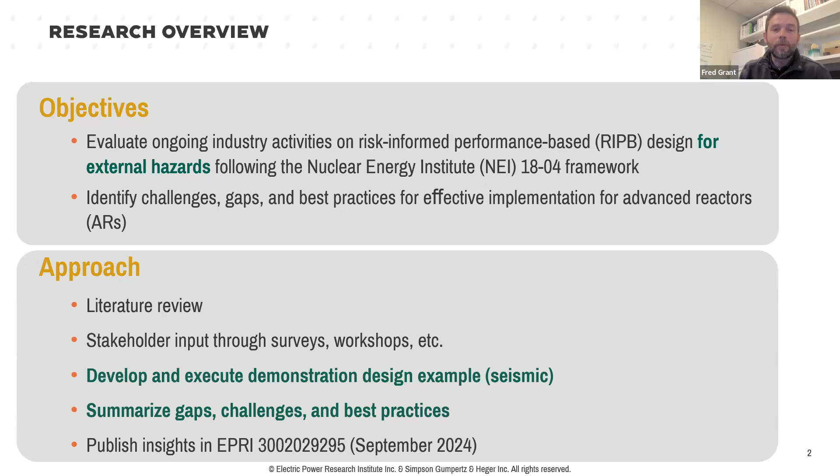The two green bullets below will be the focus of this presentation. We'll walk through the demonstration example, then cover a few insights, gaps, challenges, and best practices that were identified. The report number is listed for anyone interested, available for EPRI members and EPRI Advanced Nuclear Technology section sponsors, ANT sponsors.

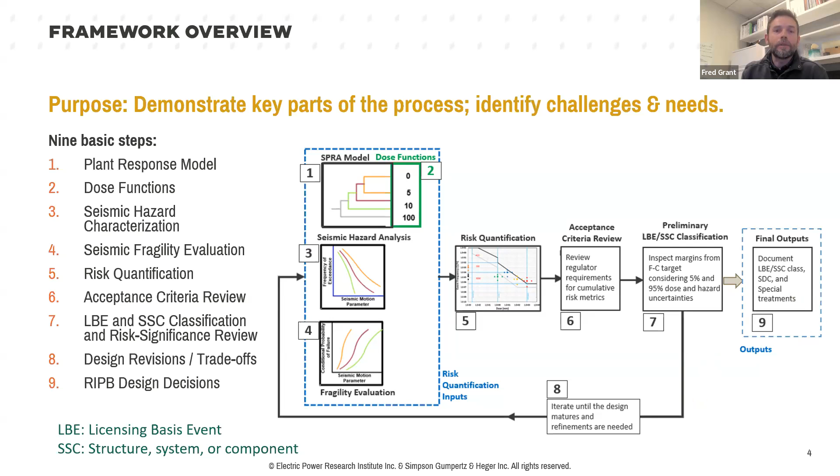The next slides will step through the example that we did in this research project.

The NEI 18-04 guidance defines several processes that go into execution of this RIPB design. It starts by defining the licensing basis events. This involves identifying all the kinds of failures that could occur for the various SSCs and systems in the plant.

If the LBE frequency and consequence falls in the upper region, where the frequency is higher than 1e-2 per year, it's characterized as an anticipated operational occurrence, classified as an AOO. If it falls between 1e-4 and 1e-2 failures per year, it's a design basis event. If it's below 1e-4, it's a beyond design basis event.

For each of these, NEI 18-04 provides guidance for treating each kind of LBE differently. So there's a process for classifying them, and then requirements for handling each type.

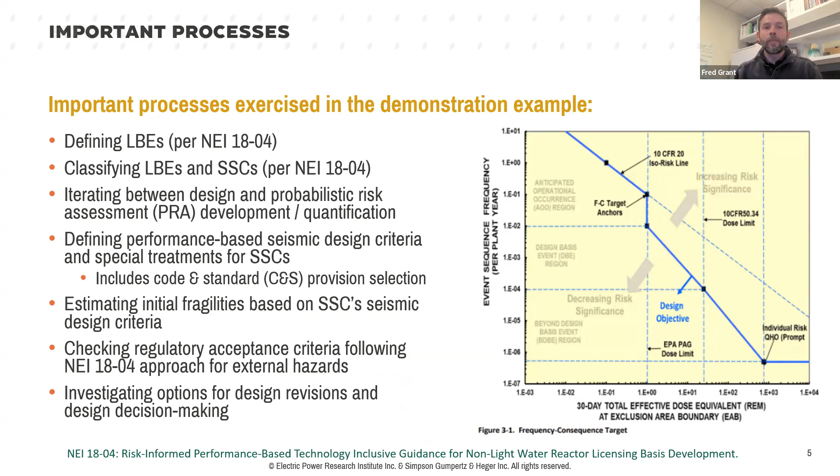The five top events are: reactor building failure, reactor vessel and support integrity failure, failure to insert SCRAM, system for heat removal failure, and backup heat suppression failure—five different systems. And there are six different LBEs, SEIS-1 through SEIS-6.

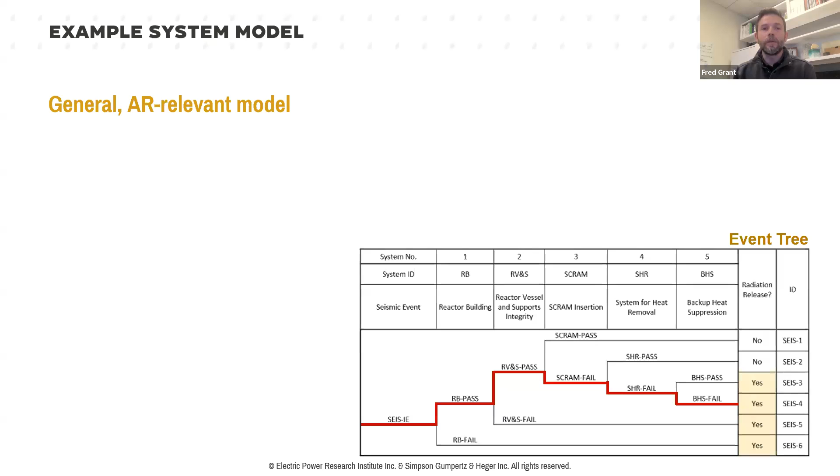We broke down one of the 5 systems into a little more detail than the others. Each of these, the reactor building, is modeled with one basic event for simplicity, one fragility. Similar for RV&S and SCRAM.

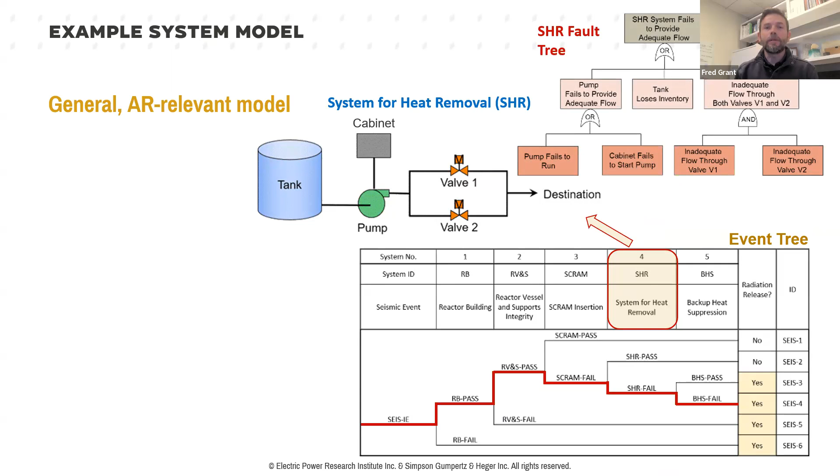The system for heat removal we broke down a little bit more. We had 1, 2, 3, 4, 5 different components representing a coolant system, a reservoir, a pump, control cabinet, a couple of valves. We modeled that system with a fault tree, modeling how different failures of individual components combine. We just put a little more detail into one of the systems so we could play around with how changes in design criteria might be affected by the complexity of the modeling.

So for each item in this model, we made some initial assumptions. We classified each system either as safety related, non-safety related with special treatment, or non-safety related. For the safety related components, we assigned design criteria following traditional light water reactor nuclear codes and standards, performance requirements, safety factors, and so on.

For non-safety related with special treatment, we used commercial codes and standards with some special treatment, some additional augmented requirements necessary to achieve a desired performance target. And then for the non-safety related components, we use commercial codes and standards, commercial factors of safety, commercial performance requirements, and so on. So this use of commercial codes and standards, particularly for the non-safety related with special treatment, NSRST components,

is we think critical for realizing the kind of cost-saving potential that RIPB design has to offer. Switching from the safety-related paradigm, the nuclear paradigm, to the commercial paradigm for design requirements - that's really where I think the nuclear industry stands to save a lot from using a risk-informed performance-based method. So that's what we tried to exercise here.

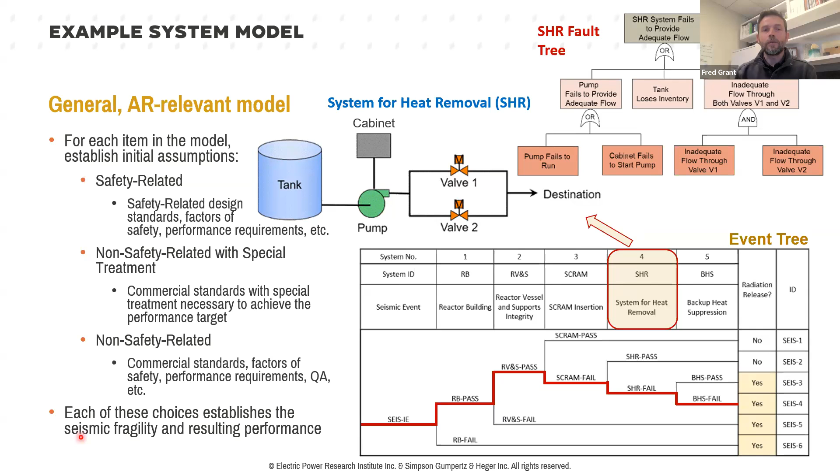But as a first cut to start to think about RIPB design for your plant, you can use just the design criteria to develop your reliability metrics.

So we take the design criteria and we take our event tree model, and what we can do is quantify, based on the fragilities that were developed and the seismic hazard that was selected, we can quantify the mean risk. We have a corresponding dose consequence, as I mentioned in an earlier slide.

We have uncertainty on each of those, and 95% and 5% confidence uncertainty, both on the event frequency and on the dose.

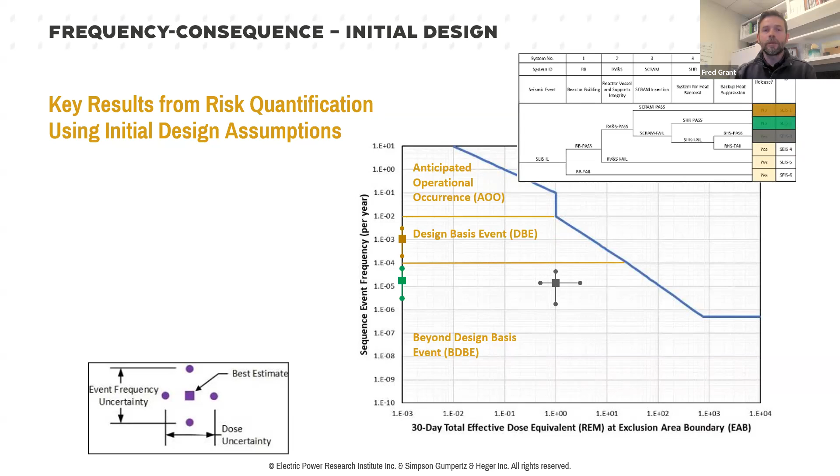The two LBEs that don't result in any radiological release, I guess you don't really have to plot those, but those show up here with the frequencies shown with essentially 0 dose consequence. And then the remaining LBEs plot as shown here, SEIS-4, 5, and 6, each of which has a corresponding dose consequence and a frequency.

So what we see here from this initial cut: we specified safety-related, traditional LWR nuclear design criteria for the safety-related components, commercial codes and standards for non-safety related with special treatment. And we find that some of the initial designs result in frequency consequence outcomes that exceed the FC target.

So this blue line is the so-called FC target. In NEI 18-04 and LMP, it's not strictly an acceptance criterion. It's really more of a design goal.

It could be acceptable to have LBEs exceeding that frequency consequence target, but it gives a guideline that tells you, if all your LBEs do fall within that FC target, then you probably have a design that will meet all the regulatory requirements in terms of reliability and dose. So it's not a strict requirement, but it's desirable to meet it.

This initial design had some outcomes that went beyond the FC target. That's not a favorable result, especially early in the design. And so, the next step is, what do we do about that?

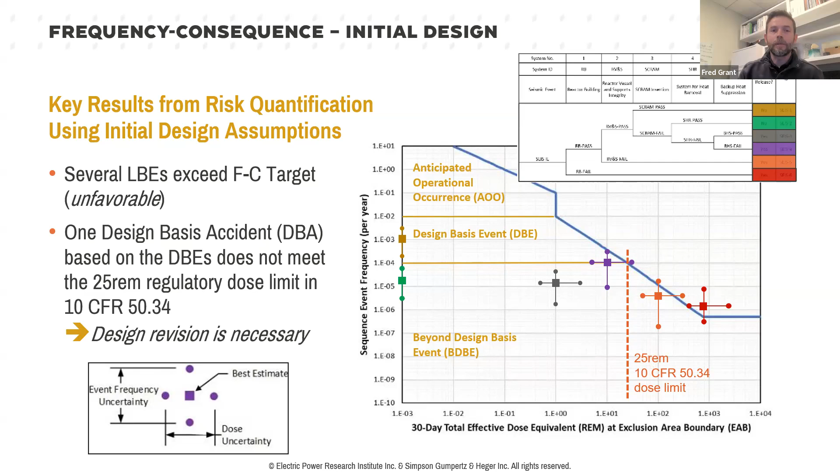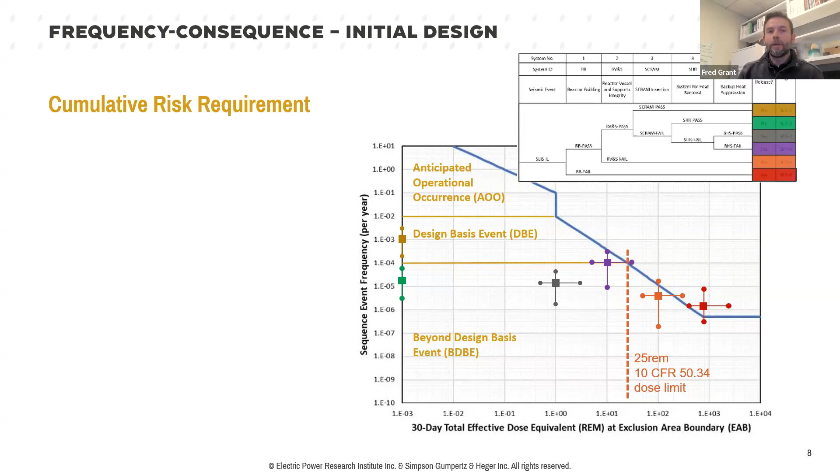There's another check that we do. There's a number of other checks related to cumulative risk and other regulatory criteria. For this example, we just looked at one of those: the cumulative risk requirement. There's some others like quantitative health objectives and so on that we didn't get into, but for the cumulative risk requirement, there's a different threshold. It's 100 millirem at the exclusion area boundary.

The requirement is that the sum of frequencies for all LBEs exceeding that 100 millirem at the exclusion area boundary has to be less than 1 per year. So just to walk through that, we get rid of the no consequence LBEs, since those aren't relevant. We're just focusing on the LBEs with exclusion area boundary doses exceeding 100 millirems. We don't have to worry about the uncertainties for this check, we're just looking at the mean frequencies.

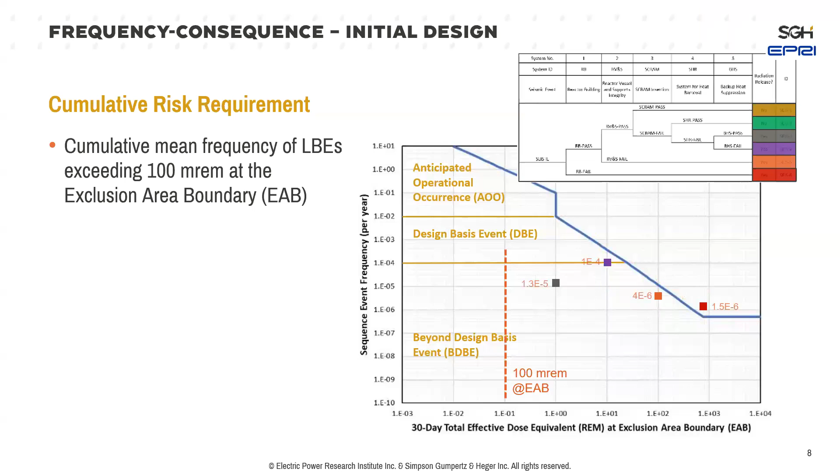We look at the frequencies for each of these LBEs. So this one's about 1e-4, 1.3e-5, and so on. We add those all up together and we get about 1.2e-4. Then we check to confirm that the total frequency for LBEs exceeding 100 millirems is less than 1 per year. In this case, for our four LBEs, we're well under that threshold, like less than 0.01% of the threshold.

If these were the only failures we had to consider for this design, that would demonstrate that we've met that requirement. We're way under the requirement. So a little insight here is that probably external hazards are not going to challenge this cumulative requirement. The contributions to this 1 per year are probably going to be governed by lower dose events that are higher frequency, maybe in the AOO region and the DBE region.

The 1804 and LMP process sort of precludes LBEs resulting in significant doses from occurring in the AOO and DBE region by defining a design basis hazard level, which for seismic is equivalent to something like a safe shutdown earthquake, an SSE. So the process says: specify a design basis hazard level or SSE, design all your safety-related systems to survive that, design all your non-safety-related systems to ensure they don't interfere with your safety-related functions at that SSE or DBHL level. What that does is push all your failures resulting from external hazard initiating events down into the BDBE range.

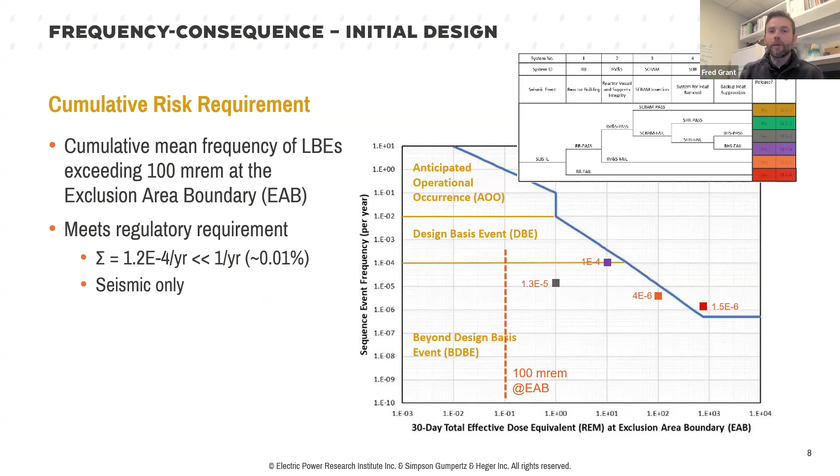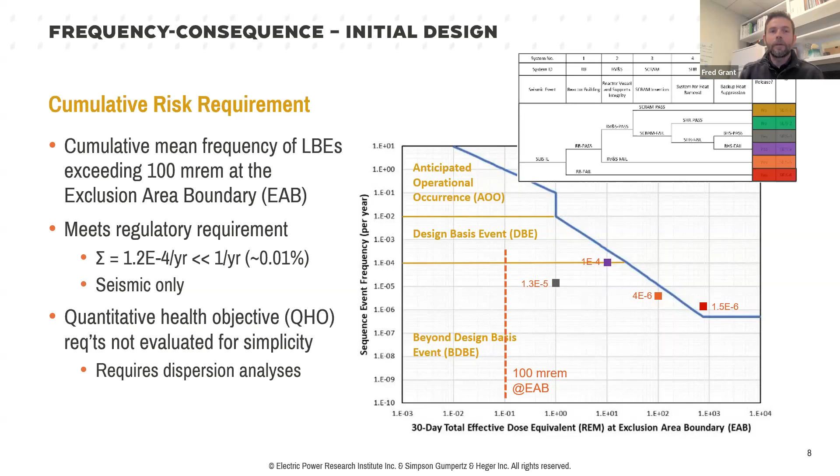There are other cumulative risk metrics, like the quantitative health objectives. Those weren't evaluated in this example for simplicity, because that would require radiological dispersion analysis — once you have a dose release, how does that move, and what does the population look like around the plant? That's just too complicated for this, and really not unique to external hazards. I'm sure there are some unique aspects, but we were trying to focus on external hazards.

So the next step, once you have those initial design frequency consequence outcomes, is to consider potential design revisions. Those design revisions could take on all kinds of different forms.

Some examples: you could reconsider the seismic design criteria, or impose special treatments on SSC designs. Maybe you require a maximum demand to capacity ratio, DCR, for some structural components, like requiring the DCR stay below 0.8 or 0.5 to increase reliability and pull these frequencies down.

You could reclassify SSCs depending on where these fall. Maybe you take an NSRST component and make it safety related. That would change the corresponding design criteria.

You could change your plant design by figuring out ways to limit the dose consequences, provide additional protection barriers. We can refine the performance targets, either the capability performance targets, or those corresponding to limit states for structural design.

So maybe rather than characterizing failure for a structure as the onset of concrete cracking, we could allow some non-trivial drift, because that doesn't really compromise the function that's credited in the PRA for that structure. So we can refine the limit state that characterizes failure of individual components, or do some combination of the above.

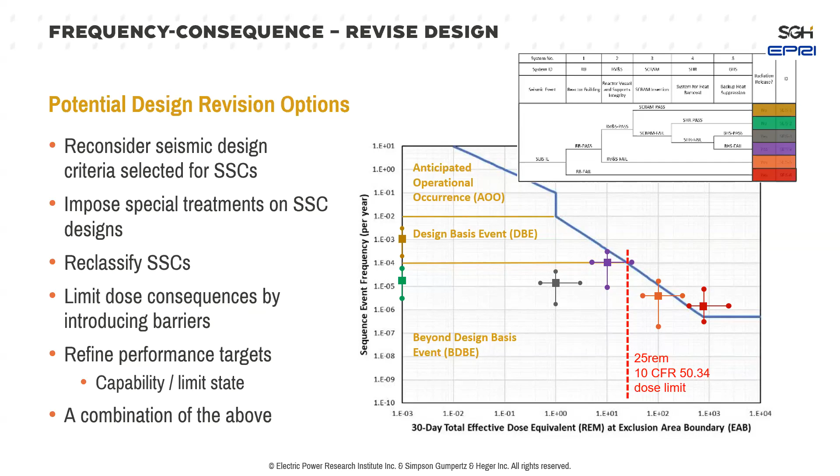Yeah, so a lot of what we're doing is the risk informed part, right? You do the PRA and you get some risk insights, and then this is where we use the risk insights to potentially change the design criteria. So we can impose some additional margin or something to change the design criteria.

And then what we can do is specify, for example, that a building's or component's performance is required to achieve certain performance targets. The performance targets for structural design or external hazard design are normally characterized as a reliability target and a capability target. For a reliability target, you might say this structure has to have a failure frequency less than 1e-5 per year due to seismic events.

That's the performance target baked in for safety-related components in ASCE 43 for LWR nuclear structures. So that design standard is actually performance-based, right? It specifies your performance target in terms of reliability. And although limit states are not traditionally used for LWR design, it has a set of capability targets or limit states.

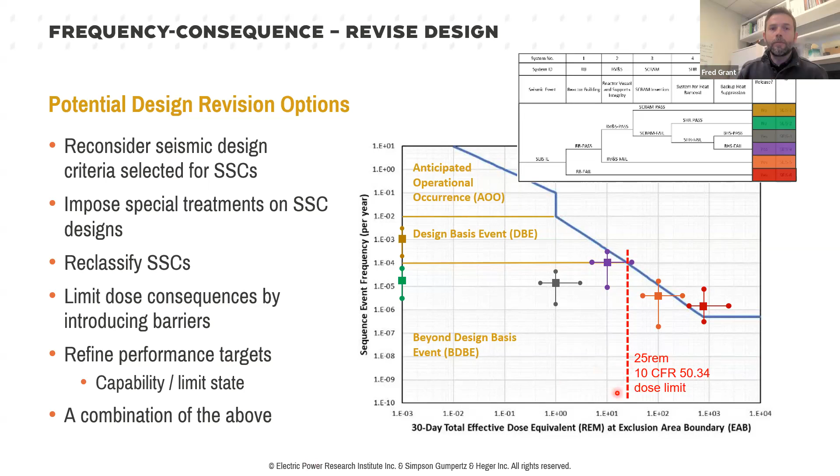The special treatments that were selected limited the DCR, basically a pretty simple special treatment, just adding margin into these components. This was postulated as being the best cost benefit of several options considered, but certainly there are other design options that could be implemented. So the key takeaway here is that this framework does indeed allow optimizing the design for cost benefit as the design progresses.

So some insights. That was the design example. What do we learn from that and from the literature review and the stakeholder engagement? One challenge from this process has been identified by many folks: the initial PRA at early design stages can be challenging to develop because there's limited site-specific data, limited plant-specific data, limited design information. And so those initial PRA insights can change significantly as the design progresses.

Follow-up research - if you pull up the report, there's several pages of areas identified that would benefit from additional research and guidance. Two things came out of it that were prioritized by EPRI and the EPRI members.

One of them is how do we use this method to select the codes and standards for structural design? I mentioned that LMP has limited guidance there, especially for external hazards and structural design. So there's some ongoing research there.

The other research area prioritized was treatment of very rare seismic events in RIPB design. If you look at the FC chart, developers have found it's kind of difficult to ensure we're keeping LBEs out of this range that's pretty rare, beyond design basis and high consequence - because eventually at some point you will have a wind event, an external hazard event, a seismic event that fails your structures. No structures are completely impervious.

And if structures fail, it can be unclear exactly how to characterize the dose consequences of the structural failures. So if you have potentially a large source term, and some structures that enclose it, those structures could fail and result in high doses.

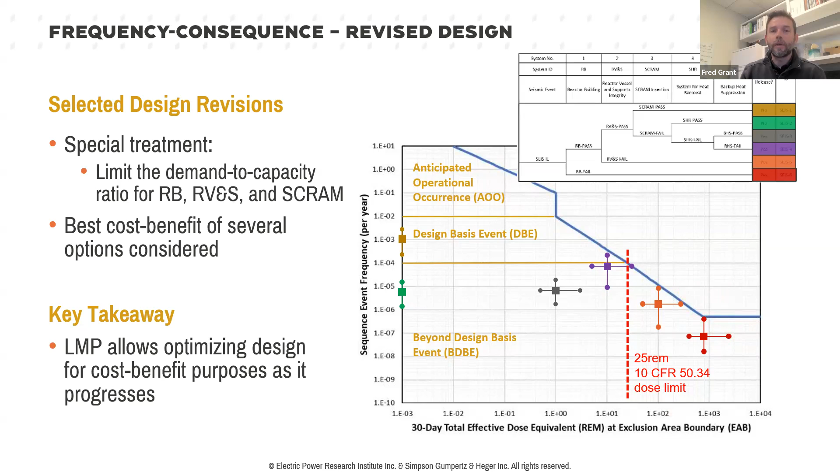So this is kind of a trouble area, and there's ongoing EPRI research to look into why that is and what we can do about it, especially because that's a very uncertain range. We're talking about potentially earthquakes that have never been seen before, 2G, 3G plus PGA. There's a lot of uncertainty in what that means exactly - how does it affect the plant and the structure?

So, two areas of follow-up research.

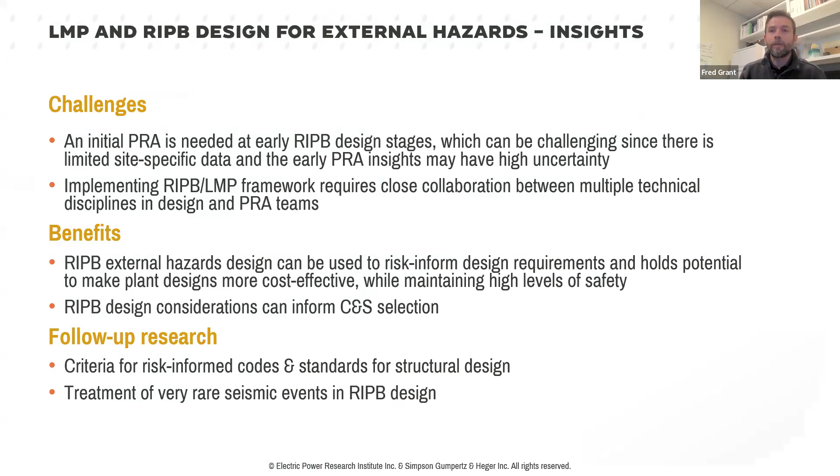I have some more slides. Looks like we have about 10 minutes. I could get into these bonus slides I put together if we had time, on some ongoing research on code and standard for RIPB design, but I don't know, Brandon, what do you think? Should we take questions or proceed ahead? I saw some activity in the chat.

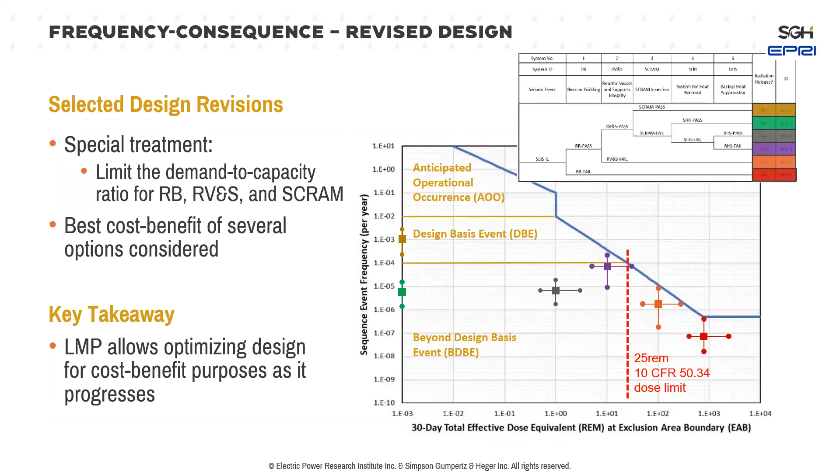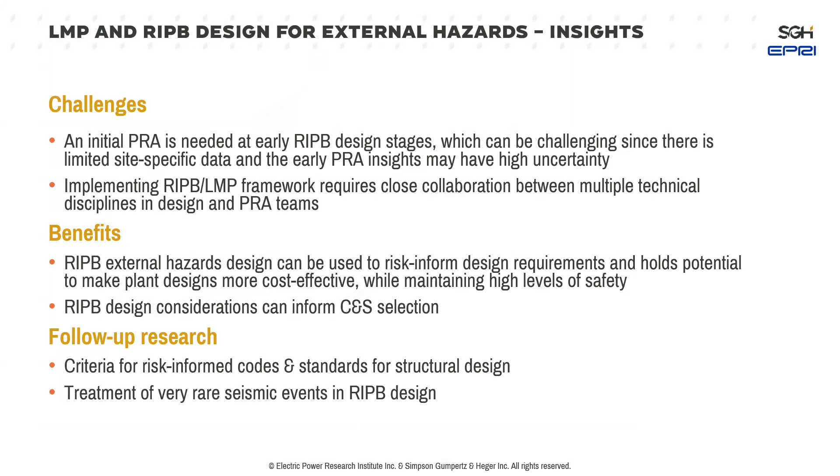Yeah, so I think the one thing that might - I don't know if it looks like maybe in slide 17, to your point on the codes and standards selection, kind of what this - how the special treatments are actually selecting the different requirements. I don't know if there's a way to just jump to that and point out the difference between using within a given standard, or selecting between standards, how that looks at the special treatments. But if that's too much, there are a couple other questions.

Yeah, maybe I'll walk through this one, slide 17, that gets to that - I think that's what you were suggesting. So this is follow-on research for code and standard selection. This is just kind of an illustrative example here, so don't take any numbers on this slide to the bank. I have a disclaimer on that at the end of the slide here.

But the idea here is we have a nuclear standard, ASCE 43-19, and we have the commercial standard ASCE 7. Again, focusing in here on seismic - 43 is seismic, 7 covers wind and other loading as well, but has some seismic provisions.

So focusing on seismic, each of these codes has sort of design levers you can pull. ASCE 7 has risk categories 1, 2, 3, and 4. ASCE 43, like I said, has limit states and seismic design categories - limit states A through D and seismic design categories 1, 2, 3, 4, 5.

Each of those sets of criteria will specify a seismic fragility, essentially. So if you said, I'm going to design this structure to ASCE 7 risk category 4, that specifies a certain reliability. If you open up ASCE 7, you could find the specified reliability for each of these risk categories. Some of it's not super transparent, it's not like here's your fragility, but it says something like a 1% failure probability in 50 years for collapse. And so you can interpret from that and derive structural reliability.

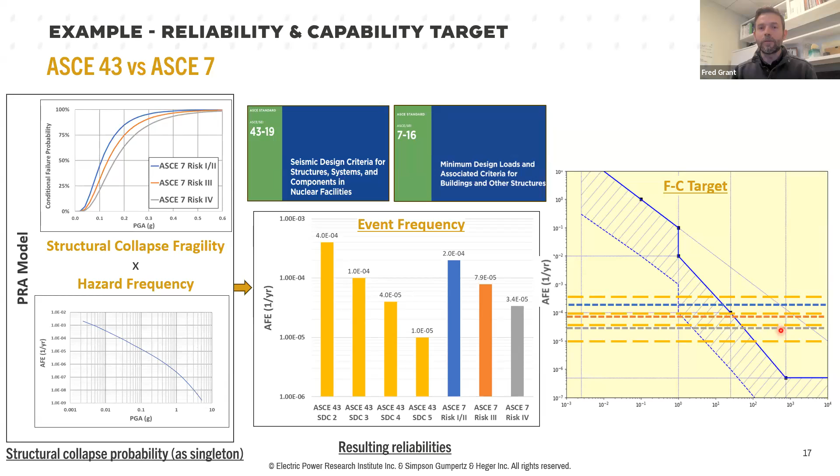Now, translating that into the LMP 1804 framework, here's our FC target. We can plot these reliabilities for the nuclear code, the 4 different SDCs, as frequencies of structural collapse, frequencies of exceeding that limit state. And then we can plot each of these ASCE 7 structural design criteria, the reliability achieved with each. You can see those in the dotted blue, orange, and gray lines here. Sorry, it gets kind of messy.

Imagine we could quantify the high confidence dose corresponding to collapse of this structure, and we could say that the dose at the exclusion area boundary, if we collapse the structure, is limited to 20 rems. Then we can infer from that a target reliability of about 1E minus 4. So we go into the FC chart, assuming this is our design objective. Again, it's not a regulatory limit, this FC chart, but it could be a design objective. We can specify that we want to achieve a reliability performance for this event, which results in a 20 rem dose of about 1E minus 4.

We can plot that here again, and we can see that SDC4, SDC5 from the nuclear code, and risk category 3 and risk category 4 from the commercial code, they all achieve that desired performance. So any one of those codes would theoretically achieve the required performance for this component, for this structure.

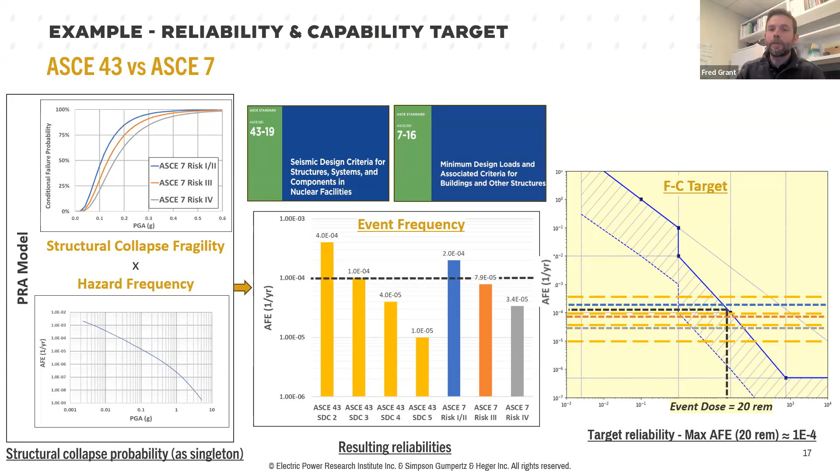I think there are some members of 2.26 online today - I'm a member of the working group. I understand the committee is looking at revising it too, which might make it even more useful for risk-informed performance-based design. The revision is ongoing, and there's also been a request from a developer to use it for a nuclear plant design. So these things are in process.

In the meantime, there are ways of addressing the unmitigated consequence within the standard itself. Appendix C of the standard provides a lot of guidance.

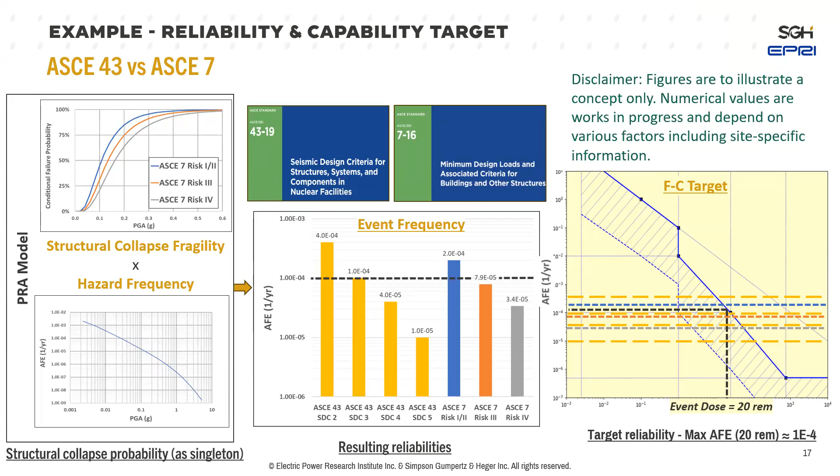There was a question about the specific scope of the ongoing rare seismic events work. Do you have maybe a sentence or two more on the primary focus of the very rare seismic event, risk-informed performance-based design?

Yeah, we did some sensitivity studies, some investigation. The hypothesis going into that project, and the prevailing wisdom I think, was that as you go up into the very high hazard ranges, the uncertainty in the hazard gets so large that it's effectively meaningless, and you can't develop meaningful risk insights because the uncertainty ranges are so big in the high hazard regions.

We did some investigation into that, and it's interesting because while the hazard uncertainty gets really big in the high hazard regions, the fragility uncertainty actually goes to zero, basically - you get up to a certain level and everything is failing, all components have a failure probability of 1.0. So the actual uncertainty in the risk insights up in those high hazard regions is relatively small. There's a sweet spot in between, where you haven't failed everything yet, but you're up in the high hazard regions where the hazard has a lot of uncertainty. We're looking at various ways to deal with that.